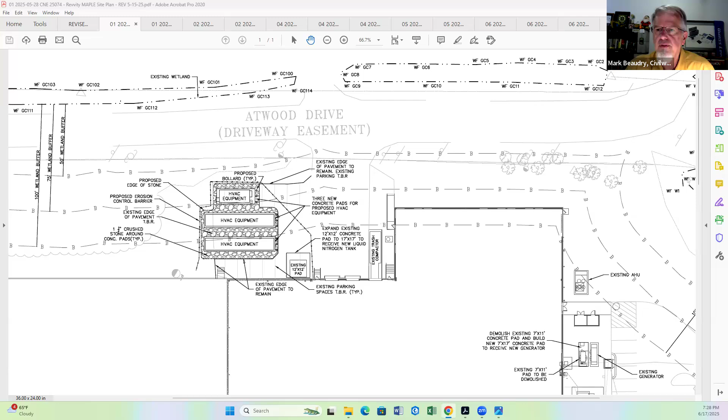But now that's a standing, valid wetland delineation. And if you pan a little to the north, you can see there was another wetland with the series W1 through W9 at the end of Atwood Drive. That's also part of the 68 Elm Street project.

Now the other line, which is hard to see, I think it's flag number 128, angles down to the northeast. That's the wetland line delineated as part of the original Perkin-Elmer project for 5 Parkwood and 68 Elm, dated back to around 2012. I think the commission decided at the informational meeting that wetland is so well defined, though maybe not as much as the drainage channel, that it's pretty well defined because of the slope.

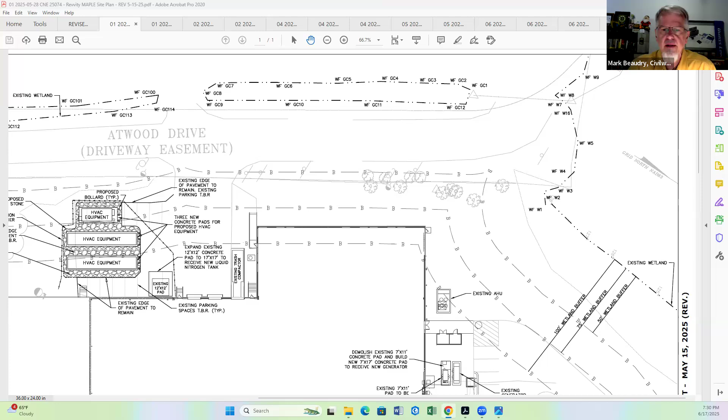So it was decided that line did not need to be redelineated. Importantly, there's another piece of work happening on the north or back side of the building, which is the proposed generator pad, well outside the buffer zone, as you can see. With that slope, there was no way the wetland line would change enough that the buffer zone would come into question. So the plan has been updated for that purpose, which is important. That's one of the things I mentioned.

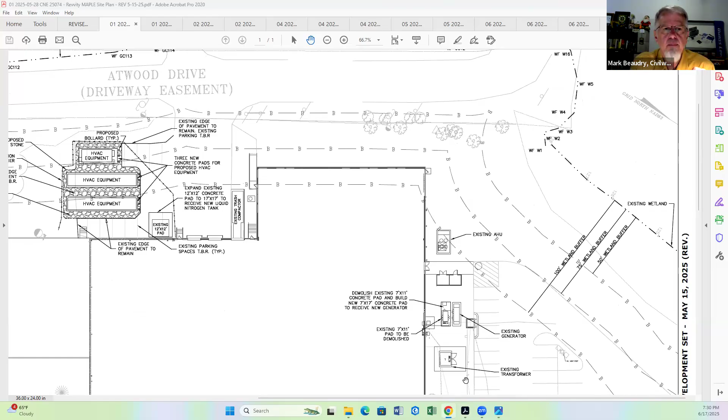And back to the HVAC equipment, maybe Judy or Anna, whoever's controlling here, could zoom in a little. What we did at the commission's request was move that outer HVAC equipment pad, which is closest to Atwood, to the north, so the entire pad and stone surround is within the area of existing pavement.

So now there is no new pavement, no new disturbance between the 50-foot and 75-foot lines. That's all previously disturbed land, and in fact it's going to be improved by switching the pavement to stone around the pads. Then in the 75-foot to 100-foot range, those pads still stick a little into the grass area.

That again is previously altered grass, and we left that as is because we couldn't change those pads without really affecting all the rooftop equipment and everything. So that outer pad was able to be changed.

And importantly also, with the addition of the stone around the pads, we're actually reducing the impervious cover on the property by 867 square feet. This area was used for parking of 11 cars, but with removing the parking spaces and replacing them with a component that is clean and has a lower impervious footprint, it's actually an environmental benefit to the area.

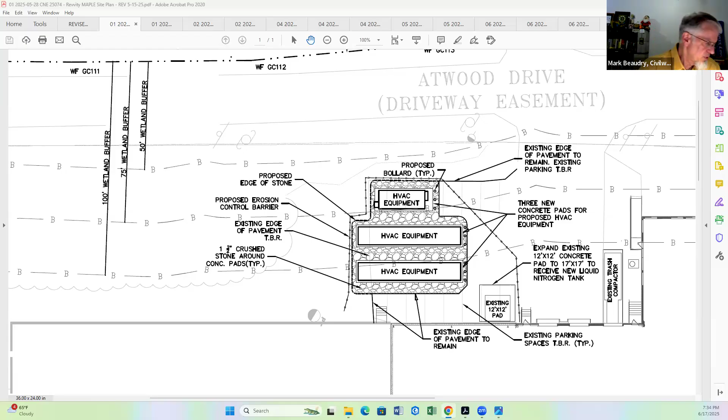So anyway, let's see, I'm sure there's something else. We did get some comments back, and oh, by the way, this is also not in any natural heritage priority habitat area or anything like that. Those Mass GIS information and whatnot was included with our application.

Oh, I know what I was going to mention. Under the local bylaw, one of the comments from Lucas Environmental was that we did not submit a formal wetland bylaw waiver request form. The way it was left by Lucas Environmental was that the commission should discuss whether they wanted that or not. At first, when I sent a letter back responding to comments, I deferred and said we're more than happy to discuss that. But during the day today, I looked at the form and realized it's quite straightforward.

So what I ended up doing was actually preparing that waiver form and included it by email with the plan revision and stuff. There you go, to Judy and Anna. So basically, I could read through it quickly.

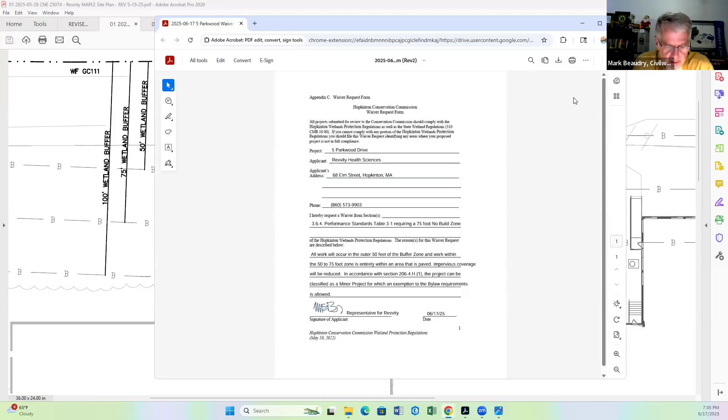I hereby request a waiver from section 3.6.4 performance standards, table 3-1, requiring a 75-foot no build zone. The reason for the waiver request is that all work will occur in the outer 50 feet of the buffer zone, and work within the 50 to 75-foot zone is entirely within an area that is paved. Impervious coverage will be reduced. In accordance with section 206-4H1, the project can be classified as a minor project for which an exemption to the bylaw requirements is allowed. Representative for Revvity, Mark Beaudry.

So obviously we respectfully request that waiver. The site is entirely paved now for the most part, and it's certainly within the 50 to 75-foot area, and then there's only a minor amount of disturbance of a previously disturbed area in the 75 to 100-foot zone.

Great, thank you. Is that it?

A couple others, I'm not sure if Lucas Environmental had a chance to review our response to the comments that they had, but I could go through them really quickly if you'd like. I don't know if the commission has seen them. I did see them, they came in yesterday, but I think we got them today. I was able to catch them and take a look.

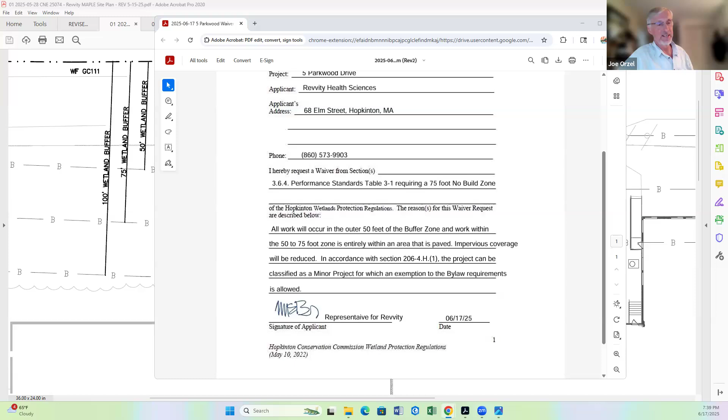Great, excellent. So the only other one I saw, Mark and Joe, was comment 2G, which is simply about PIBs and whether they're needed or not. Otherwise it seemed, Mark, that for every one of Lucas's comments, you made the adjustment or agreed and made the fix.

Yeah, and what Joe had suggested was a note on concrete wash, a note on what to do if there was stockpiling going on, and adding an erosion control barrier detail, and we did all that. So just really quick on the concrete wash, we basically followed the US EPA guidelines where we suggested a plastic lined hay bale pit where you put the concrete wash in, either pump out the water or let it evaporate, and then take the solids and dispose them off site. So that's what we called for on the plan.

Regarding what I'd expect to happen as far as excavation, it's realistically probably going to be loaded into trucks directly and hauled away. But if there was a small chance of a small stockpile, we would absolutely surround that by hay bales, by an erosion control barrier, and we included a note on that on the plan. The detail was basically for a silt sock type detail that we often use these days, so that detail was added to the plan as well.

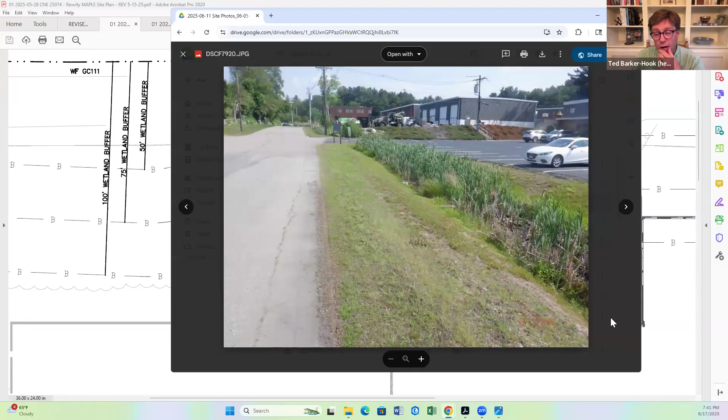Great, so I think what I'd love to do is ask the commission your thoughts on PIBs on this property. I'll offer that in this case, I don't know that I see a need for PIBs. The edge of the water is pretty obvious, and there are streets involved. It's not like a homeowner with woods in the back where trees may get cut down or anything like that. But I don't get to make the decision. In my mind, there's no need for PIBs, but I'm wondering what the commission thinks.

I would be in agreement, Ted. I agree as well. Yep, I agree. Is there anyone who doesn't agree? Please speak up.

By the way, an update: Ed is having trouble getting on. He's in town hall but can't seem to get Wi-Fi, so hopefully we'll see him soon, but he's struggling to get in. Maybe we'll see Ed in a bit.

Commission, was there anything else in Lucas's notes, or if you got to look at Civil Works' responses that you think we need to address? Not for me.

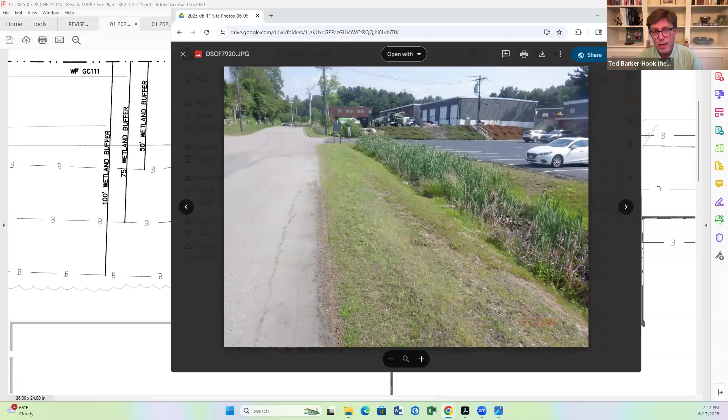Hearing none, is there anybody from the public who has questions or concerns about this project?

Speaking of the public, Mr. Vice Chairman, it turned out, like Joe was saying, something was happening with our PDF creator that day, and the map of the 300-foot abutters was total gibberish on the PDF. So I provided a new, clean PDF of that today for the record. Great, thank you. You're welcome.

It feels to me like we're ready for a vote, but I'm going to get the wording wrong. So I'm wondering if Anna or Judy can tell me exactly what the motion is we're looking for. Yeah, let me pull up an example for you so that I don't mess it up.

So this was one of the last RDAs that you all had voted on. If you're voting for a negative determination, meaning they don't need to file for an NOI, the language is: area is not subject to jurisdiction, work is in jurisdiction but will not remove, fill, dredge, or alter. Work described in the request is within buffer zone but will not alter, therefore does not require filing of a notice of intent. And I can double check what the request was from the applicant for what it should say.

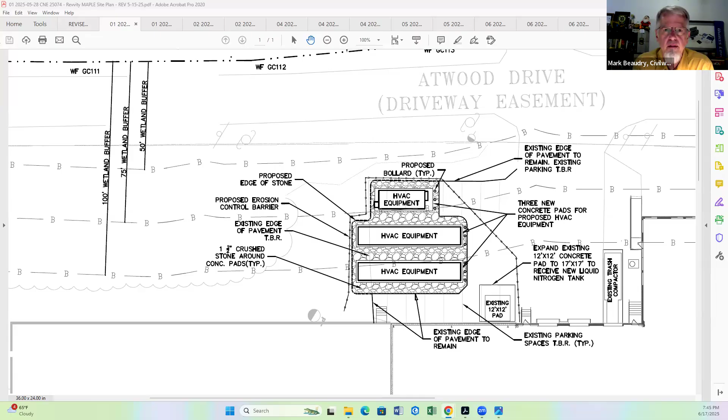I'm probably going out a bit on a limb, but is it possible to discuss the certificate of compliance request? Because we did get comments back on that today from Lucas Environmental. I'm thinking that might go quickly.

Anybody? Yeah, go ahead. We just got comments back from Lucas this morning, and I have not looked at them. So I have no recommendations, unfortunately, yet. None of us have seen any of that work, Mark. So we're going to need you to come back to deal with that as a separate issue.

All right, if we could do it soon, because from my understanding there's some kind of real estate transaction in the works with the owner, and this being kind of hanging out there is kind of holding that up. So the sooner we can get that done, the better. But I do absolutely understand where everyone's coming from.

Judy, do we have space on July 1st, or is that a packed meeting? Usually we don't schedule COC discussions until staff are fairly confident the board will approve, and like I said, I haven't looked at what Joe's comments were yet.

Mark, we'll do the best we can for you. That's all we can promise. Excellent, that's all I can ask. Okay, thank you very much. Have a great night, Mark. Appreciate it. Bye-bye.

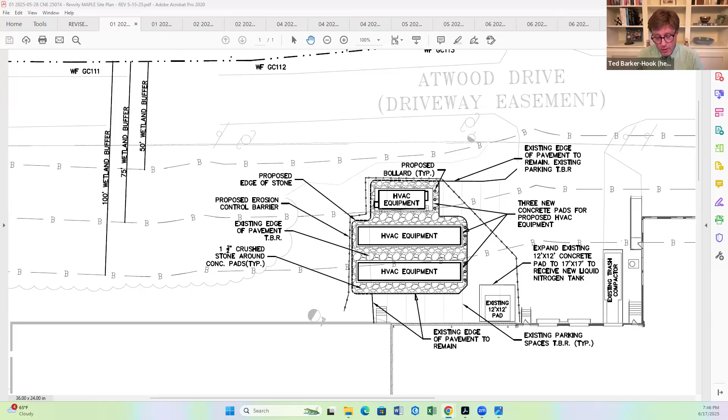Okay, moving right along, we have to open another new hearing, which means I get to read another piece of paper. The Hopkinton Conservation Commission will hold a public hearing on Tuesday, June 17th, 2025 at 7 p.m. virtually online to hear all persons interested in a request for a determination of applicability filed by Donald and Karen Wolf to replace a septic system with appropriate associated site work. The location is 11 Edge Hill Road, Assessor's Map R7, Block 19, Lot 0.

I have one small question before I even open the door to you.

Wolf's. Is Edge Hill Road one word or two, and does it matter for her paperwork?

Hi, this is Karen Wolf. Typically two, but I don't think it matters. When I was on Google Maps, it seemed to be one word, so I got confused. But thank you. Would you like to tell us about what you're hoping to do?

Sure, my husband is representing. Karen Skinner is our representative. Welcome, Karen. Would you like to fill us in on what's going on?

Certainly. For the record, my name is Karen Skinner Catroni. I'm a wetland consultant representing the owners of 11 Edge Hill Road.

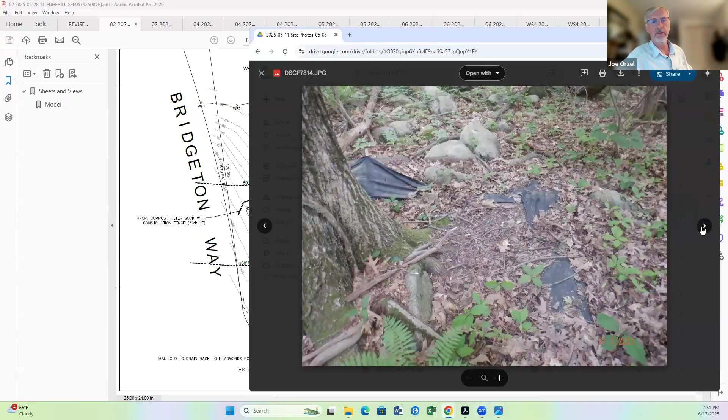there was some leaf dumping in the area of wetland flags 2 through 5, probably not associated with any work that happened on this lot. I spoke with the property owner when I was out there. There's old silt fence remaining in the area of wetland flags 1 through 3, along the wetland edge into the wetland and actually in the stream located in that area. Based on my discussion with the property owner, I think that was associated with work that happened for the crossing for Bridgeton Way a number of years ago, but it's still in the field, and probably someone should get that out of there.

Joe, before you go on—just on that point, is that the kind of work that a homeowner could just pull out, or is that going to do damage to what's going on there? Does it need a more careful hand than just removal?

I think parts of it can be removed fairly easily, but parts of it are kind of buried, and it's gonna take a little work. I didn't follow the length of the whole thing, so I wouldn't be surprised if parts are well buried. I just kind of saw the parts that were exposed and the part that crossed the stream.

Commission members, that'll be something to keep in mind, I think. Thanks, Joe, keep going.

Just regarding the certified vernal pool that's mapped, as Karen had mentioned, it's about 250 to 275 feet off-site to the southeast. That's where the Mass GIS pin marker is for the vernal pool. Looking at aerial photos, it looks like the actual edge of the vernal pool, when you can see ponding, is larger than that, and potentially with the additional buffer zone under the bylaw, the edge of work could be getting close to that additional buffer zone.

However, I think really where they're locating the system is as far away from that vernal pool as it can possibly get, so I don't know that there's any other option if it were within the extra 125 foot setback. And it's a replacement system, not a new system, so I think that may remove it from consideration for that extra buffer.

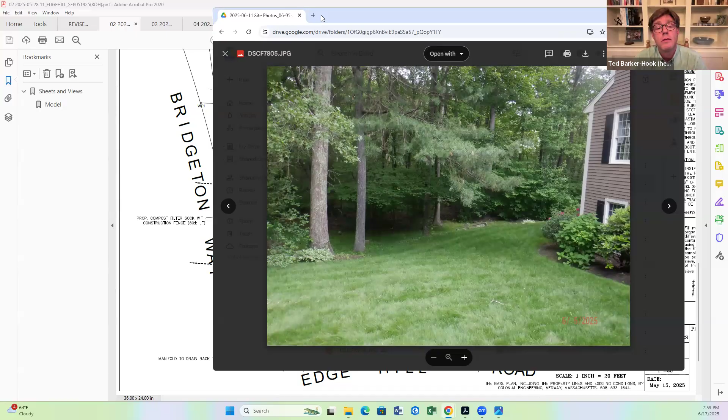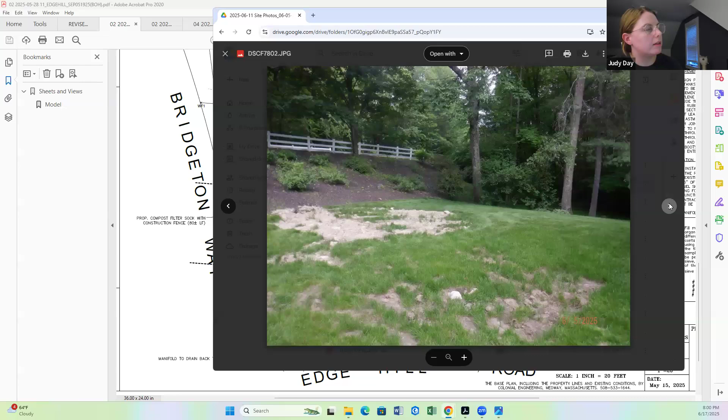So yeah, what I'd like to see, and what I hear, let's look at some photos really quickly at the backyard. Do we have several, Judy, or just one or two? So this is the side, and then these are all Joe's pictures. And then you come around the back. This is where the leaves were.

And I think this is the best shot we have of the limit of lawn in the back. Does the lawn, Don, kind of stop where those stones are, or do you mow on the other side of those stones? I actually mow the stones, but it's not grass, it's mostly weeds. So I just try to keep the weeds under control by mowing them. But the grass is just really where you see those rocks, it doesn't go into that area.

So it would be helpful to me, and I'm going to open up to the commission in a moment, because actually we haven't talked about your septic at all. I jumped right to these other issues. It would be helpful to me if I had a plan that better showed me the edge of the grass and where the PIB markers would live, because those rocks throw me for a loop a little bit, and I can't quite, from that photo, understand exactly where lawn would be, where a marker would be. So, yeah, I feel like I've gotten things out of order because we haven't talked about your septic at all.

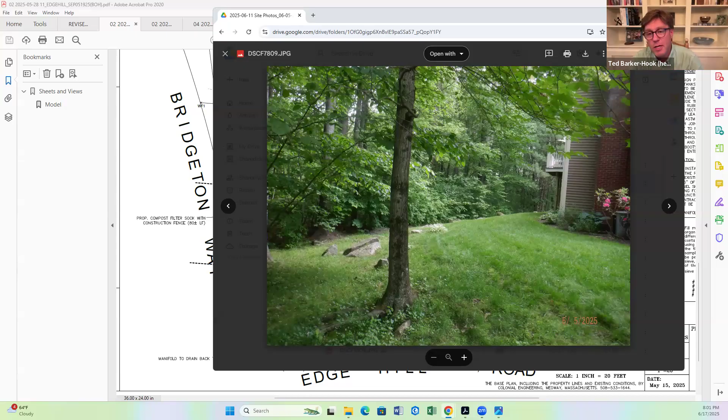So let me do this. Commission, I'm going to shut up for a moment. Can we look at the plan with the septic, and let's focus on that for a moment. Do commission members have questions or concerns with the main focus of the ask here, and doing it under an RDA?

Ted, from my perspective, I think an RDA makes a lot of sense in this situation. Getting a failing septic system repaired is certainly something we want to get done sooner than later. That's a more likely issue to cause a problem if we don't. And then on the PIB subject, from my perspective, I think if we have PIBs along the tree line at 50-foot intervals, kind of beyond the weeds, where the tree line truly starts, I think that's an appropriate location, given we don't know necessarily the limits of lawn that were originally approved as part of this development. So to pull it back feels a little unjustified unless we have some basis for it.

Thank you, Matt. Other commission members? I agree on the RDA with the septic. It's going right where the old one was. I think it's all previously disturbed. The reason I skipped over it is that part seemed obvious to me, but I don't want to think for everyone else. Other commission members on the septic and the PIB seem to be our two discussion points right now.

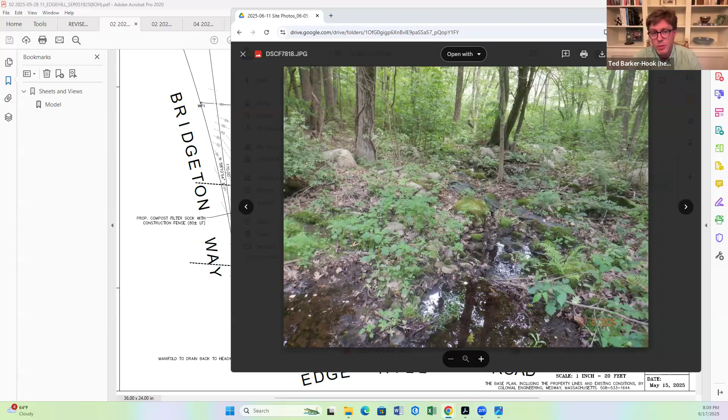Okay. Commission members, is there anything else that comes up, or did I rush through this too quickly and not give you a chance to bring up an item or two?

Through the chair, it's sort of unrelated, but if the silt fence is still there from a prior project, when they built Bridgeton Way, does that mean they never got a certificate of compliance, and should we potentially look into having them wrap that up? For the Bridgeton Way builders? Yeah, if the silt fence is still there, does that mean there was no certificate of compliance, because we would have had it removed then?

That's a good question. Through the chair, we can look into that. I don't know off the top of my head, but that's a good question. It is a good question. All right, thank you, Judy.

Sure, and thank you, Janine. Oh sorry, I heard the J and thought you were thanking me. No, sorry, I did. Well, I thank you both. I thank Jim as well.

Commissioner, all right, good to be. Anybody else have a thought or something they want to throw in? Is there anybody in the public who has a comment or question?

So I think what we're looking for is a motion for a negative determination and permission for signatures. Through the chair, yes, sorry, I would maybe recommend if there's things you're still looking for on a site plan to hold off on issuing a DOA so that the timeline doesn't start and we know we can get those materials.

I think you're right, because I would like to see the erosion control around the pile, and maybe we could put on there where the PIBs are going to live. I think you're right, we ought to hold off a vote for one more meeting. Are you okay with that, Don and Karen?

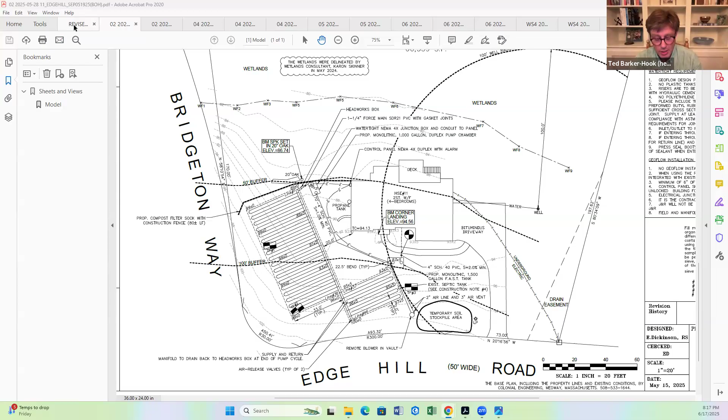Through the chair, can we just open and vote to continue the other one, please? You know, I had a mental note for that before and then I forgot. So yeah, we're going to open the hearing and then we're going to continue it immediately.

The Hopkinton Conservation Commission will hold a public hearing on Tuesday, June 17th, 2025 at 7 p.m. virtually online to hear all persons interested in a notice of intent filed by Alicia Ila Solon and Samara Vern Solon, 1993 trust, for parking lot alterations with associated site work. Location 85 to 89 West Main Street, Assessor's Map R23, Block 75, Lot 0.

Do we need to vote on continuing it? Yes, I would love a motion to continue that hearing to July 1st, 2025. I'll make that motion. Second. Roll call vote: Jim, aye. Melissa, aye. Janine, aye. Heather, aye. Matt, aye. And Ted Barker Hook is an aye.

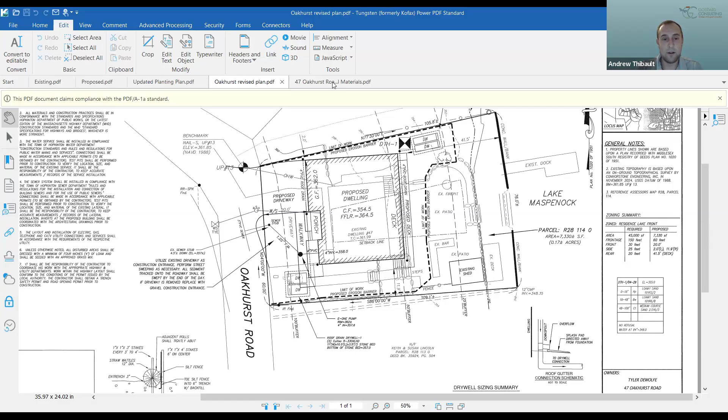We also added the FEMA flood zone line to the plans. Another important submittal was discussed at the last meeting. As of now, we're currently showing a 25-foot no-disturb and a 50-foot no-build.

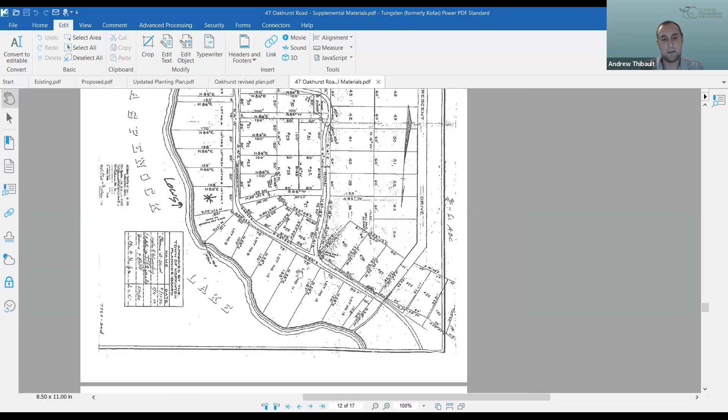We had some conversation on the waiver request we'd submitted and whether this property would be subject to a 50-foot no-disturb or a 25-foot no-disturb. In the revised materials, the commission received the subdivision plan of land last revised in 1950. We clarified in our comment response letter on May 20th that we feel the 25-foot no-disturb and 50-foot no-build zones are applicable to the project here.

Another request from that conversation at the last meeting, in the Lucas letter, was about the fact that at the time we were showing much of this work as existing.

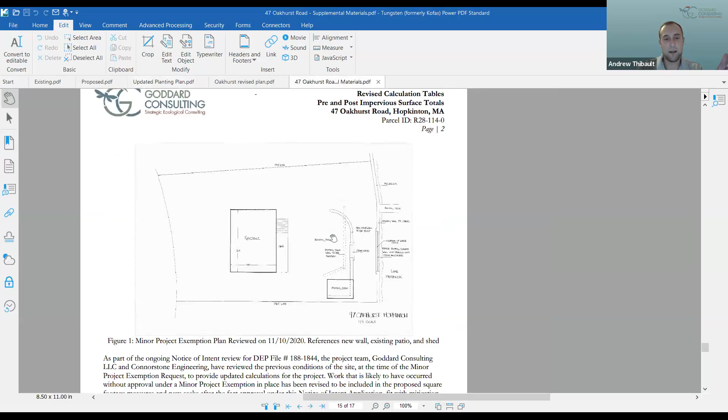We had that conversation about what portions of this were done under the expectation of that minor project exemption that appeared not to have been granted. It seems like some of the work being called existing really needs to be captured under this notice of intent. So we worked with the engineers to go back and look at the property at the time of that minor project exemption request, to see what was there then versus what's there now.

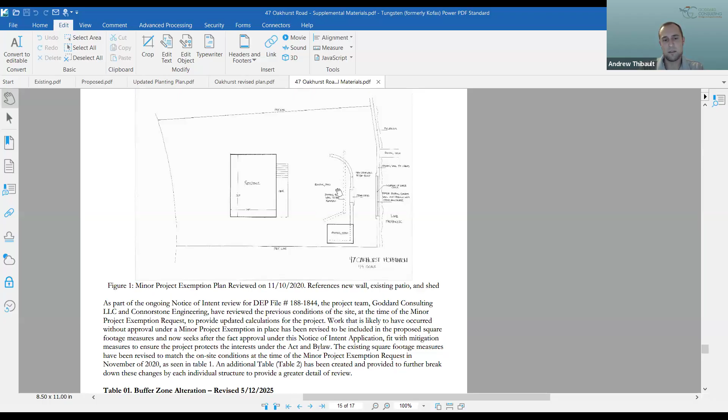We submitted a letter touching on this. What we found is that some of this work was discussed - there's the wall shown here with intent to be built. They discussed the existing shed, and made reference to an existing patio, but the work to be done up gradient wasn't quantified, exactly where it'd be located. In reviewing the meeting minutes, it seems a minor project exemption was never actually granted - it was just discussed at the meeting. There were more materials to be submitted, and things fizzled out.

So the engineers gave us calculations based on that old work of what actually was sitting on the property in November of 2020. We revised all of our buffer zone calculations on this project so the existing now means before this minor project exemption was submitted to the commission, before any work had occurred, before this notice of intent filing - that's now our existing numbers. The proposed impervious surface cover numbers are now any work done outside of that, anything proposed under this project. It's now all to be brought and quantified under this notice of intent.

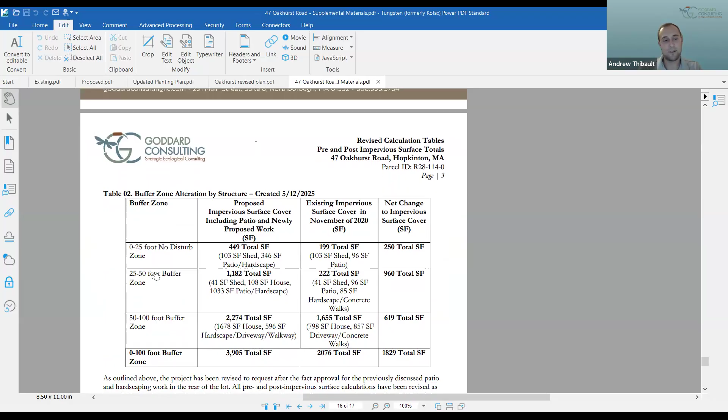We want to make sure we have approval for everything, and also that our stormwater management system is sized appropriately. We also broke that out by square footage of each structure specifically within the 0 to 25, 25 to 50, and 50 to 100 ranges. It's important to note that we found there is a complete net change to impervious surface cover.

The net change is 1,829 square feet, because the existing back in 2020 was 2,076, and we're increasing it up to 3,905. The Cultecs have been sized for 4,080 square feet, so in quantifying this we made sure they were sized correctly. With the test pit, we confirmed the separation from seasonal high groundwater.

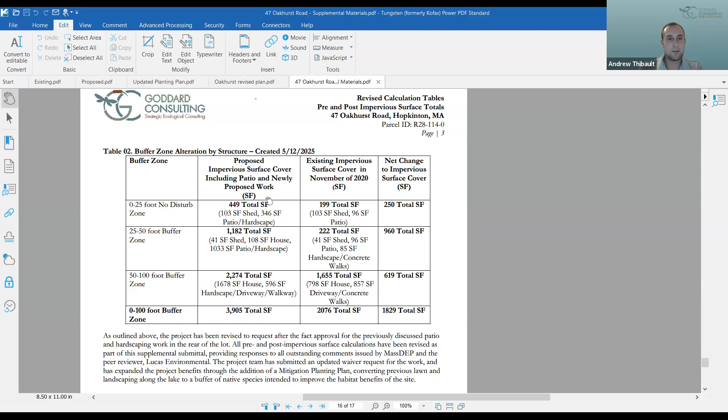This was all submitted to the commission on May 20th, and as I mentioned, we got a peer review letter from Lucas on June 4th. There were a few comments left in that, as far as minor plan revisions, a planting substitution, and also a request to include a straw bale along the plantings we see here, to make sure there's no erosion going into the lake during planting, plus a bit more discussion on the waiver request we have going on.

So the commission will be receiving an updated submittal that clarifies the remainder of the Lucas comments, but because the last meeting was canceled after we submitted this on May 20th, we wanted time to discuss all our changes here with the board, see if there are any other questions or comments, or if there's anything Joe Orzel from Lucas wants to add to my summary, and make sure the next submittal incorporates all open remaining comments.

So with that, I'll turn it over to questions.

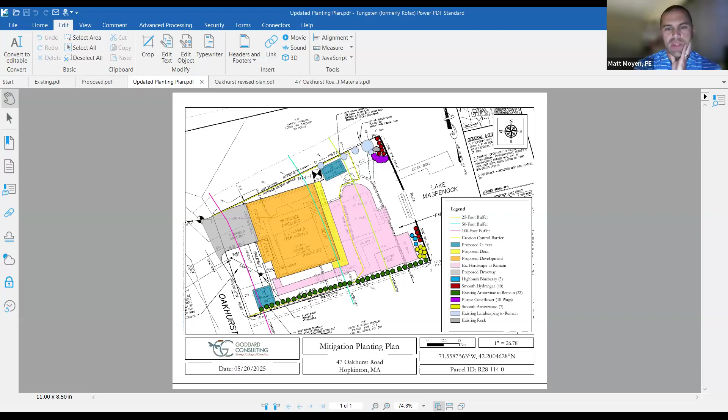Appreciate it, Andrew. Before we get to questions, Joe, do you have anything you'd like to add? I can touch on a few.

I think a lot of the original comments we had were addressed. Just a couple of outstanding items I'll touch on briefly. The applicant submitted subsequent information on a DEP superseding order of resource area delineation regarding existing lawn prior to 1983, before implementation of the Wetlands Protection Act, and how it might apply to this location.

We had pointed out there was some observed hydric soil above the retaining wall. At the time I looked at it, it was still pretty solidly frozen. I got one or two augers in, but didn't spend much time looking at the extent of that. But it looks like the hydric soil doesn't extend far above the wall - that's number one. Number two, the vegetation at that time was very low and primarily just a grass, and could not be identified at that time.

The information submitted by Goddard is that as we've gotten into the growing season, most of the vegetation coming up in that area is indicative of upland vegetation conditions. So it apparently wouldn't meet the vegetation requirements, but I have not looked at that in the growing season personally.

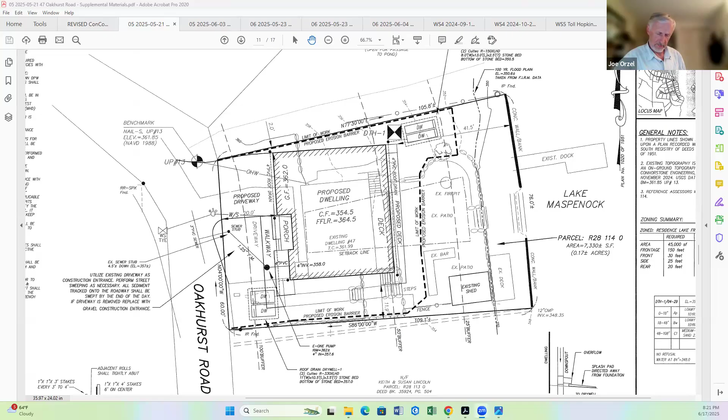Remaining question on the previous patio area. It's being considered, I think, as impervious. I was just wondering if the applicant had additional information on what that patio consisted of. Based on the aerial photographs, it wasn't apparent what the surface of the previously existing patio was, and just wondering if the applicant has knowledge of what that consisted of, as it may create a change in the pervious and impervious calculations.

Also, the Hopkinton Conservation Commission had stated in their approval for the exempted work that was approved - and I'll read the quote - further detailed information should be provided for the stairway to the lake, and it would appear to be amenable as a minor project if the steps of the stairway did not extend beyond the existing wall and did not extend into the lake. So I have some photographs that I submitted, which show that the steps are new and the steps do extend beyond the edge of the wall. Therefore, that may be something that needs to be included in the current notice of intent, because it looks like that was not included in the minor project exemption issued by the Conservation Commission.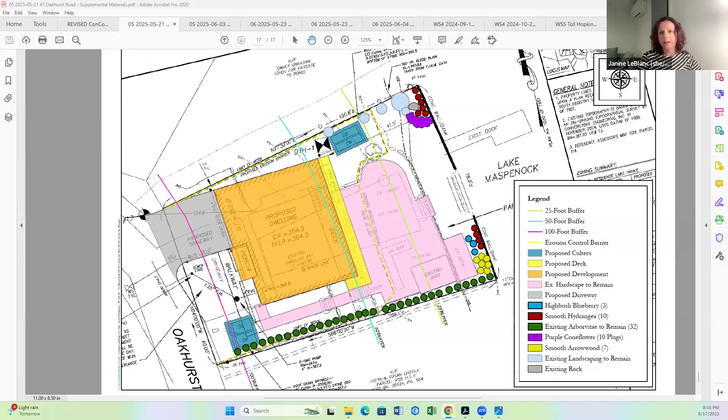Melissa, aye. Ted, aye. Janine. Abstain. Yes, thank you for reminding me. Heather, aye. Jim, aye. And I am an aye.

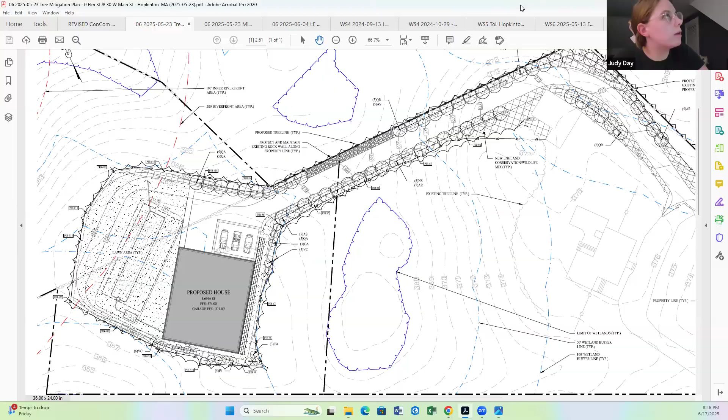Judy, if you could allow me to share my screen, that'd be appreciated. Don't worry. It should be able to. Okay.

Judy, while Sam's getting his screen set up to share, can you just update the commission on what's occurred since we last met? I think we've got some new documentation in the file. Sure, so we have updated plans showing a tree mitigation plan as requested by the commission the last time this project was discussed. A significant amount of trees are being proposed now along the length of the driveway, and the applicant has provided information on the mitigation ratio. There have been PIBs added around the house as well as along parts of the driveway. We have had a second review from Joe and have not received responses to that yet. That should be it. Okay, thank you, Judy.

Sam, if you want to run us through your presentation, that would be great. Yeah, I just want to say it's been quite some time since we've been before you, I think it's over a month now. So just to catch everyone up, we have been issued a DEP file number. And the project subject site, I'm sure you're somewhat familiar with. Just to bring you back up to speed, it's between Elm Street and West Main Street.

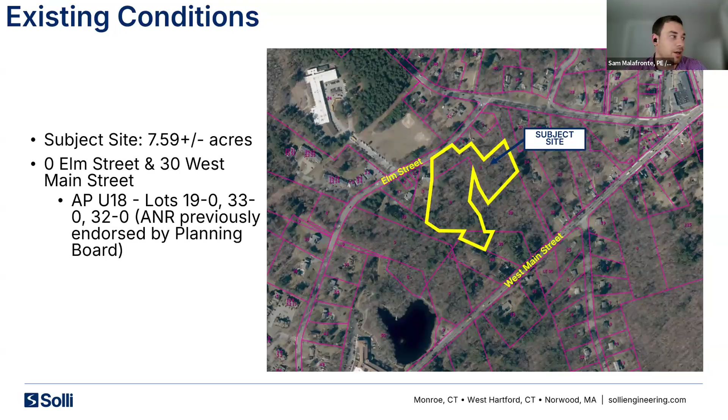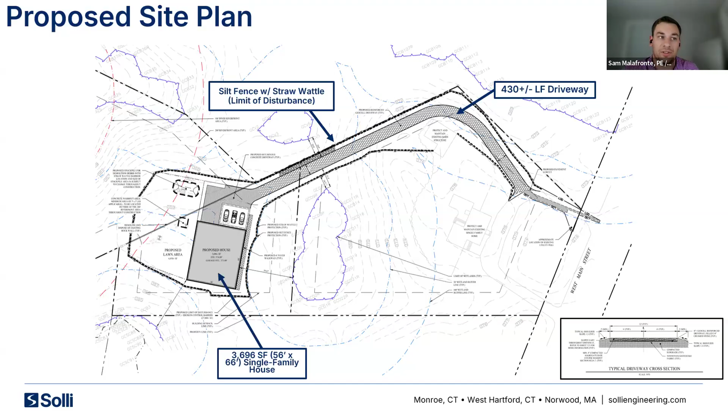The single family residence is proposed access through 30 West Main Street. And there's a significant riverfront area as well as some isolated wetlands with associated buffers throughout the property. In the revised site plan, which we briefly discussed about a month ago, we were able to reduce the impact to the riverfront area quite significantly. I think it was down to about 1.7% of the entire riverfront area of the property. It's just under 3,000 square feet of disturbance.

As we discussed previously, the disturbance is kind of in direct relation to the leaching field, and the leaching field's location is directly dependent on the soil conditions that were observed on site and performed during the perc testing. So as Judy mentioned, we have submitted a tree mitigation plan as well as a PIB plan.

So I've colorized it a little bit here just so it's easier to talk through. We are proposing 61 native trees, and I've outlined the mitigation rates that we're proposing, as well as 20 shrubs, which vary in species between summer sweet, holly, and high bush blueberry.

Judy did have an email correspondence back to me after submission regarding a PIB installation along the northern and easterly property lines, and I've outlined those with these red arrows. There are existing stone walls that run the property line, and based on the definition of PIBs in the regulations, I didn't think it was applicable to add placards as well. We certainly would be amenable to that if the commission thought it was necessary. But those do run the property line.

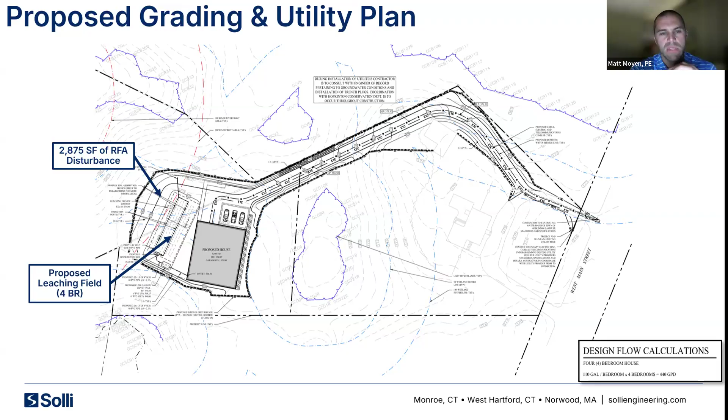Okay, that's helpful too. From a siting location - and Sam, correct me if I'm wrong - it appears the only area on site outside the buffer zone is shown on this plan, and it's sort of a somewhat rectangular shape, I guess is the closest thing I could describe it as. Yeah, right where your cursor is right now. Is that it? Can you help us understand where there is area on site outside the 100-foot buffer?

Correct, yeah. So yes, that's 100%. I was just making sure the top right corner didn't have any areas, but the only areas outside of the 100-foot buffer, also outside of the 200-foot riverfront area, are kind of this rectangular area here.

I actually sit on a conservation commission as well, and with the commission's bylaws and regulations, where you have a set no-build, I would disagree. I understand it's jurisdictional and the review areas are between the 50 and 100, but you have a set no-build that we are complying with currently. Besides that, the issue of the single-family driveway or the shared driveway, there's no waivers needed or requested. I just want to make that clear.

Obviously I don't sit on the commission and I don't have an opinion on this, but that's my opinion on how I read the regulations. So yeah, thank you. But yes, the only non-jurisdictional area is this rectangular piece.

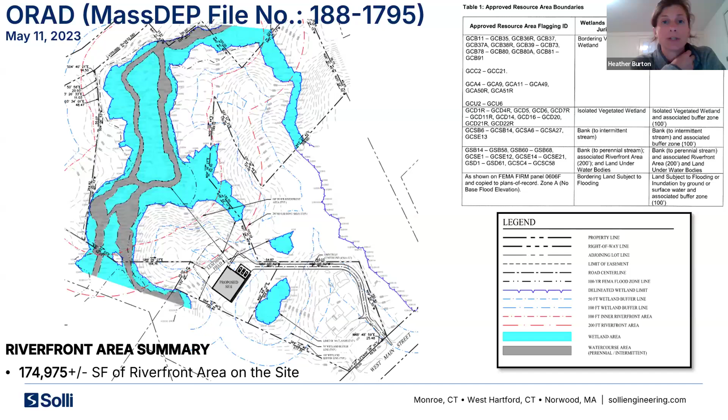So the proposal to plant 61 trees, what is the plan for maintaining those trees so that you can kind of ensure that they're going to survive? It's a lot of trees to maintain. Just curious.

It is. Truthfully, I would have to speak to our landscape architect, and I could certainly provide a maintenance plan for those. I would assume you guys would be looking for some sort of survival rate, 2 or 3 years after, as a condition of approval, similar to a replication area or such. I'm not sure how that's been regulated previously, but we'd certainly be open to that if the commission preferred it.

Through the chair, thought it might be worth mentioning, Anna and I go on exemption requests for tree removals along driveways, this close to driveways, probably on a weekly basis. So I would just have questions about the long-term viability of tree plantings that close to something that access needs to be maintained to. Just something I would add there.

Yeah, I share that same concern about proximity to the driveway and the spacing of the proposed plantings, the likelihood of survival. So I think, Sam, it would be helpful if the landscape architect could provide a narrative on those topics, so we can be a bit more informed as to what the long-term outlook would be.

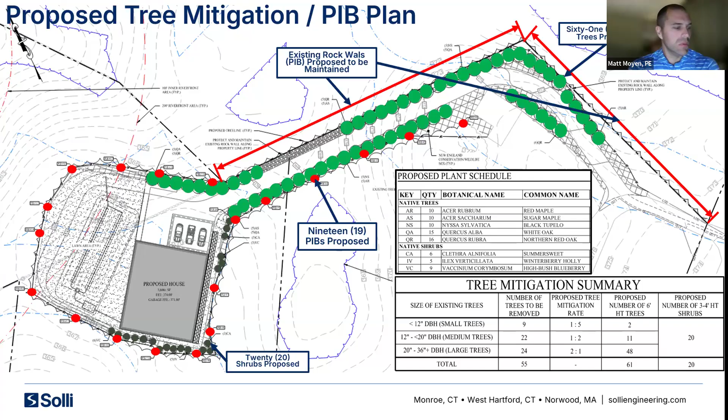And then commissioners, I think between now and the next time we connect on this particular application, just put some thought into whether or not we think there's any significant adverse impact to the riverfront area for this proposal, and whether or not we're willing to approve those impacts. And then just take a look at our bylaw and regulations and evaluate the project through that lens. Regardless of whether we move to issue an order or deny the project, we're going to want to have some clear justification for why we're doing either or.

All right, let me ask you first, Sam, are you comfortable that a week's time is enough to get updates and documentation pulled together and submitted so we have an opportunity to review it ahead of July 1st? Yeah, certainly. I can get that likely pulled together and submitted by end of the week.

Okay, so I'll entertain a motion to continue to July 1 then. I'll make that motion. Thank you, Ted. Thank you, Heather. Quick roll call.

Heather? Aye. Melissa? Aye. Janine? Aye. Jim? Abstain, please. Okay. Ted? Ted is an aye. And I am an aye. Thank you all.

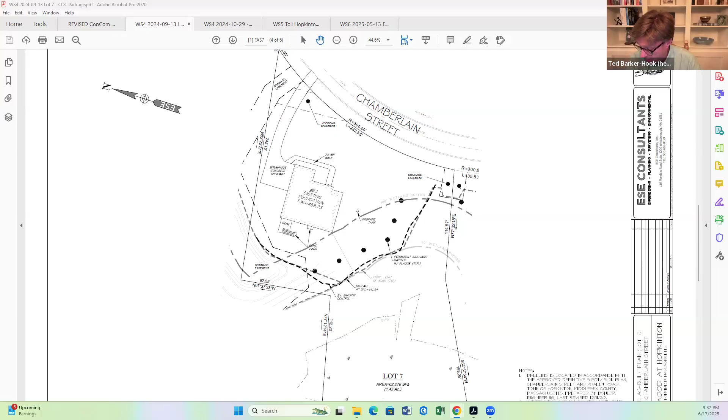Through the chair, can I just ask a brief question before we move on? You made a comment about homeowners, other homeowners possibly mowing into the buffer area. Yes, indeed. And my thought, other than telling them to not do that, which we've done a number of times...

would be to bring the COC applications before you and you potentially deny them for those reasons, so that we can then present a formal reason for them not to have a COC. Does that sound like a reasonable path to you, or do you not want your time? If that will get the homeowner's attention, that sounds like a great way to do it. I certainly would not be ready to approve any of the COCs for the houses I have in mind based on the mowing. I wouldn't expect you to, and I want to make sure we're aligned.

Let me just ask Judy, do you see a problem with that strategy, or have you spoken to them? No, I was just gonna say, I think that makes sense, but I was also planning on sending letters, doing a quick drive down both roads, seeing which ones are maintaining past the PIBs, and sending an identical letter. If we're still seeing it after that, it might take some time to notice if they're actually doing it. So if we want to get it resolved sooner, and if Ted, you're looking to really push the COCs, then that might be a good strategy as well. But I'll probably send the letters anyway.

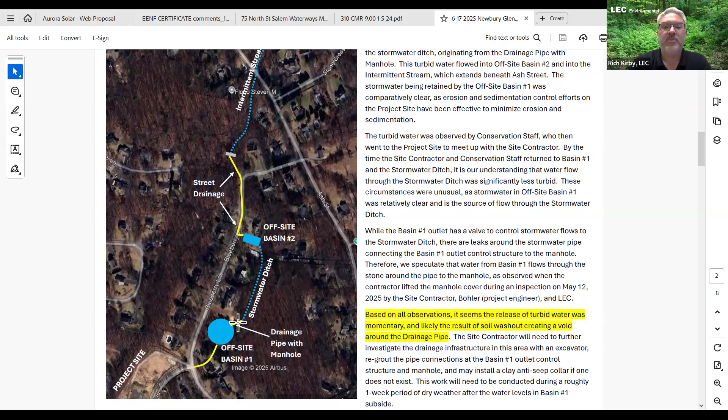And so, based on all of our observations, it appears as though it was a failure in this pipe, which had been replaced by the prior contractor, that caused the momentary release of sediment, relatively momentarily speaking. So water going into the basin was relatively clear. So it was a failure at this point that we concluded.

So at that meeting, we talked about a number of things that we were going to implement. Specifically, we were going to repair this drain pipe, which has been done. I'll get to that in a minute.

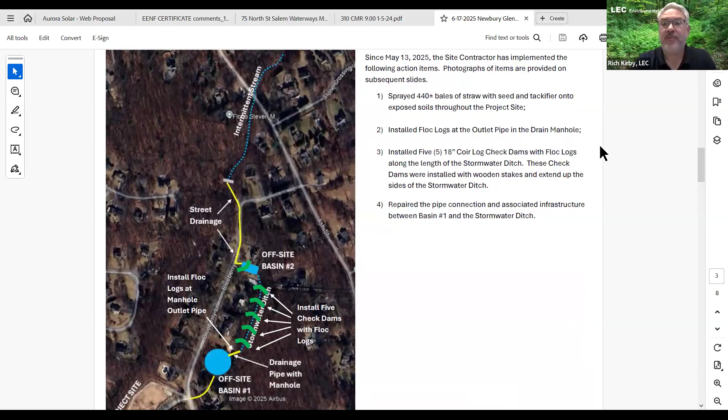We also installed 5 18-inch coir log check dams with floc logs along this section of the stormwater ditch, so if we had another release, we'd have protection to the offsite basin number 2 here. We also sprayed 440 bales of straw with seed and tackifier onto the exposed soil throughout the site. And here's some representative photographs of these.

This was submitted to the commission shortly after it was done. These photographs were taken while the work was in progress. Here's a representative photograph of the 18-inch coir log secured with oak stakes with the floc logs on the down gradient side of the stormwater ditch.

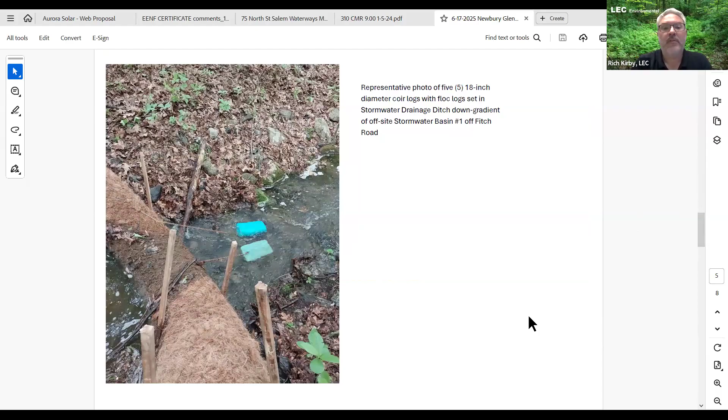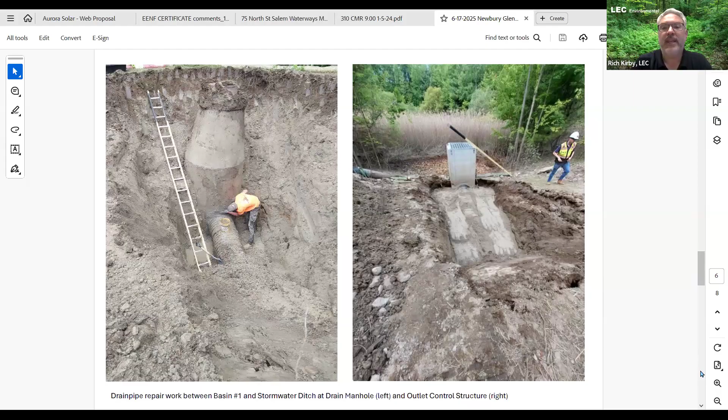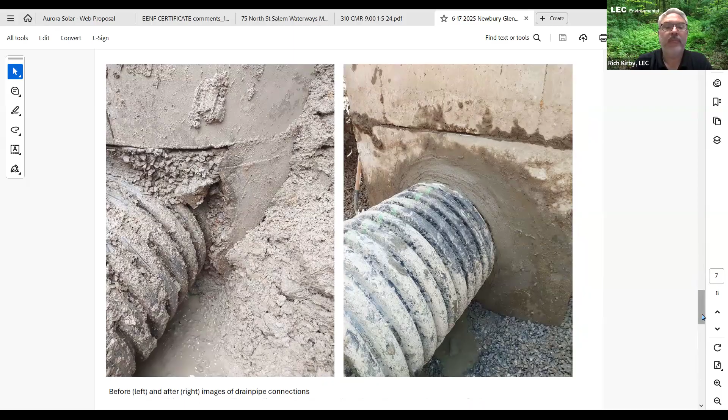And here you can see just a representative example. This is what the grout work looked like when they excavated the hole, and this is what the grout work looks like before they backfilled it in. So things were done properly out there, and we don't expect to have any more momentary releases of sediment based on the infrastructure failure at this pipe connection.

And finally, Rich, if I can interrupt you for just a second on that. Sure. Critical to note that anti-seep collars were also installed in that section that were not part of the plan, but were certainly lacking before. We thought, and found upon excavation, that water was following the pipe along that run, and installing those anti-seep collars prevents that from happening. We've seen a drastic reduction in the amount of water coming through the outlet since that was done.

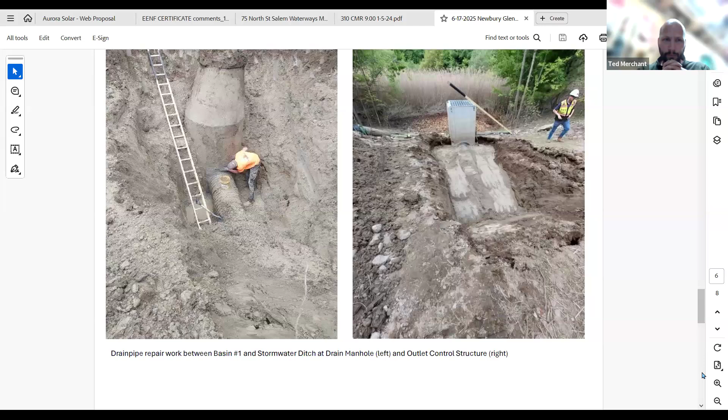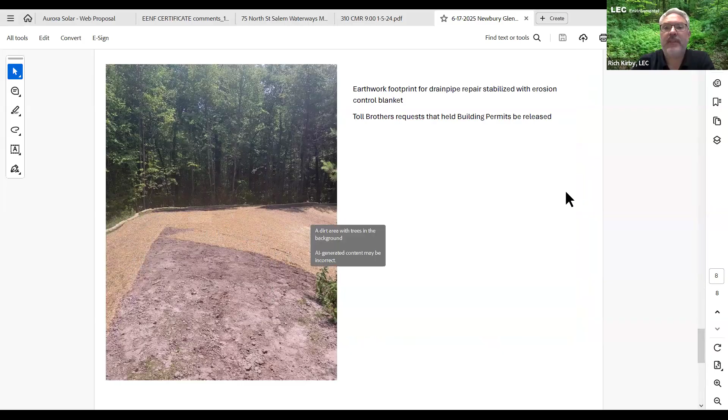All right, thanks, Ted. And lastly, all that work's been done. The footprint of excavation has been stabilized with erosion control blanket. And at this point, Toll Brothers is requesting that the building permits that had been held be released. And with that, I turn it back over to the chairman. Thank you very much.

I am wondering if we've had any commission members, or Judy or Anna, go out and see what things look like recently, or Joe. Through the chair, yep.

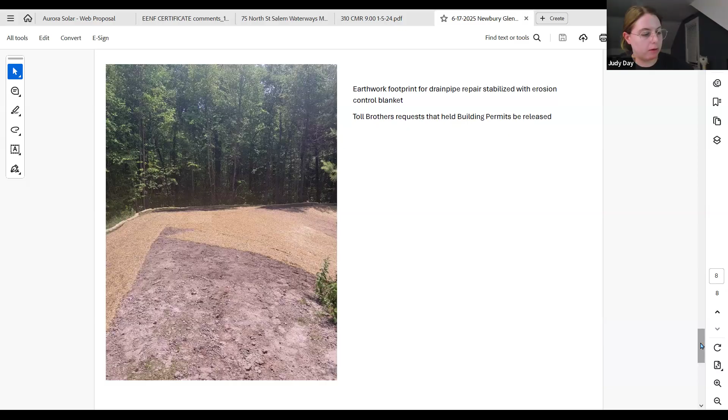So Anna and I have been going out pretty regularly. We were out when they were doing the improvements at the catch basin and the channel. We've seen the coir logs go in, and saw ourselves that after they repaired the leak in that pipe, flow downstream substantially went down.

So that seems to be working. Have observed that they've stabilized the site. Haven't seen any turbid runoff since our last discussion. So from my perspective, everything presented at the last violation discussion has been implemented as discussed, and I have not seen any additional issues.

Does that mean, Judy, that the work is complete? The work that they thought might take 6 weeks is done? Because I think it's not quite 6 weeks, and maybe they were ahead of schedule.

So everything that was presented to the commission to fix the issues with the berm, as well as any on-site issues, has been completed to my knowledge. And I have been out, we've been out there every day checking on things, making sure work is moving along. So to my knowledge, yes.

And they have stabilized where they were doing the digging with those straw mats, so even the more recent work is not currently exposed. Okay, thank you.

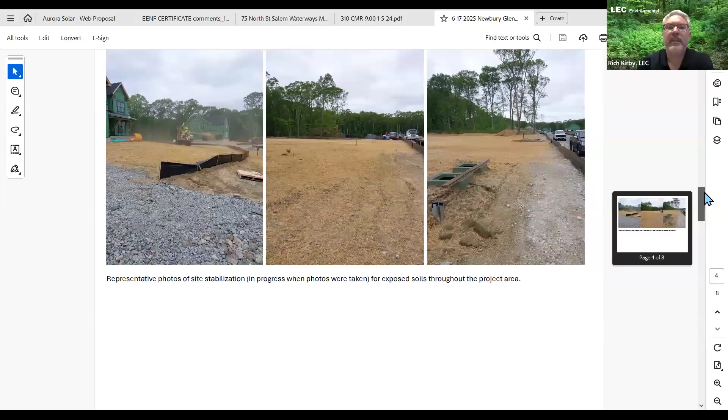Sure. So that was photographed in the beginning here. Since the last hearing, the commission really pushed us to have all areas of exposed soil stabilized. So this is where the 440 bales of straw were sprayed by Hydrograss Technologies. These are just some representative photographs of what that looks like, but it was sprayed all over. Sections have begun germinating, so we are in very good shape, in my opinion, with respect to exposed soils on the site.

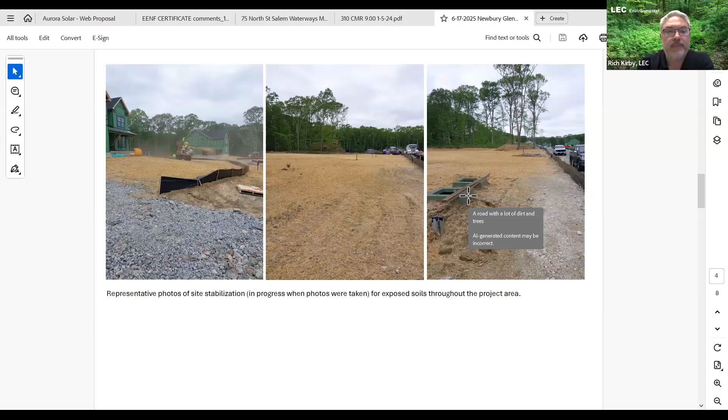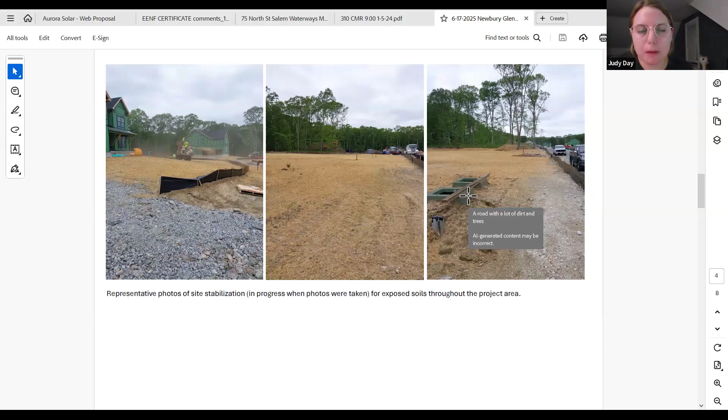Through the chair, yeah Judy. Sorry, I would also add, we did have Pare, who is the consultant responsible for SWPPP reports, observe the work done on the berm. So that was peer reviewed, and we have their memos in the SWPPP folder in the public drive folder. And did they seem satisfied?

Yes, so I can pull them up really quick. This is not me forgetting they existed, I promise. I never thought that for a moment. It might take a minute, so if you have something else you'd like to bring up, Rich.

Are you guys ahead of your 6-week guess? Did you actually complete that in less than the 6 weeks that you predicted? Yes, I think we lucked out with the weather, with the rain sort of holding off a little bit. The contractor was able to dewater that first basin using a dirt bag and changing it often, so they were able to lower the water levels to the point where they were able to do the work.

Great. I'm impressed and grateful for that.

While Judy's pulling it up, I don't want to put our commission members who are also stormwater engineers on the spot, but Matt or Melissa, I wonder if you have any questions. Oh wait, maybe we ought to pause for a second, Judy seems to have found what we're looking for.

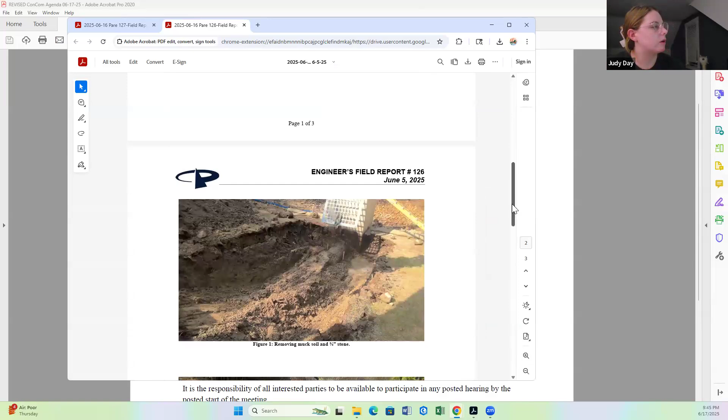Yep, so I'll clarify the materials we've gotten from Pare are more observational. So we have description of the work activities and pictures, not necessarily a narrative on whether the work was done correctly. But I think in general, when we get reports from Pare, the SWPPP reports, they identify maintenance needs or corrective actions, and we have not received any of those.

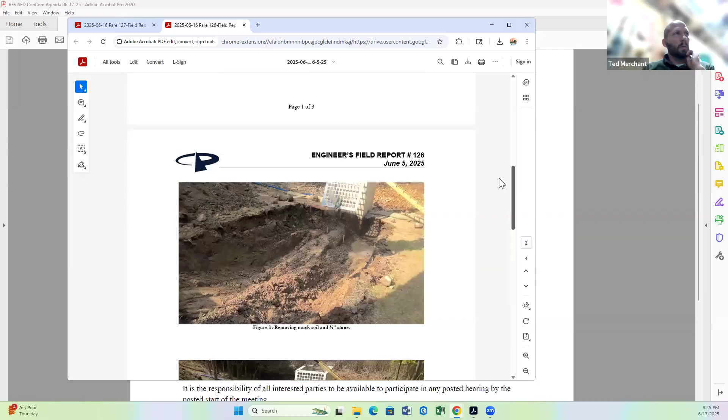And if I could, for a moment, we did supply a similar letter from Bohler that said that yes, it was installed as intended on the plan.

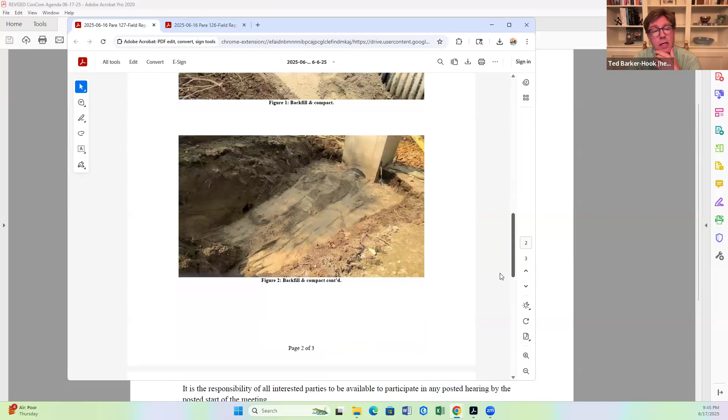Great, thank you. So again, Matt and or Melissa, I don't mean to put you on the spot too much, but I lean on you guys a lot when it comes to these kinds of issues, so I'm wondering if you have any questions or comments. You're always welcome to put me on the spot, Ted.

I can handle it. No, I think what I'm seeing here in these pictures and what Judy's describing and Rich is describing is exactly what we were pushing strongly for the last time we spoke. Source control was the big issue in my mind, and that's been addressed, and the pipe getting replaced and that berm being constructed the way it should have been many years ago are all steps in the right direction.

So I think we're at a point where they have satisfied our request. What I would be remiss not to mention is that this should be the expectation moving forward, that as work continues on the subdivision, source control continues to be top of mind, so that as other lots are being constructed, we don't run into the same issue down the road.

Yeah, amen to that. Melissa, do you have any thoughts you want to share? And if you don't, that's fine. No, I think I agree with Matt. When I look out my window the last couple rain events or weeks, the stream has been clear, so I'm happy.

So the request is that we free up the lots we put a hold on. Commission members, is anyone feeling not good about that proposal? Is there anyone who wants to suggest that we ought to wait a little longer? And if so, why? Nobody.

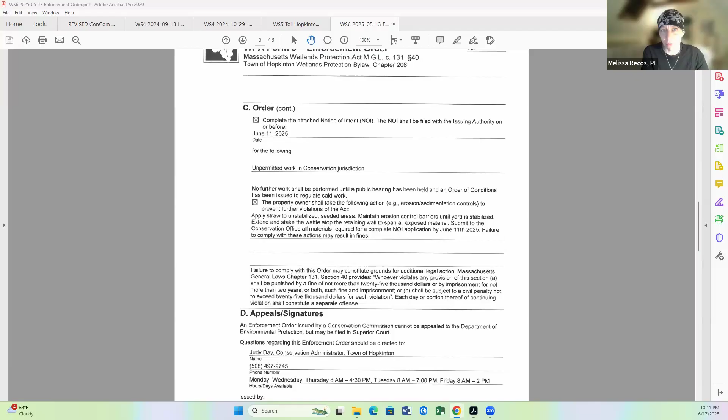So are you suggesting that we hold any fines? You said June 26th? I'm not asking for the NOI, I'm just asking for if you're going to get an engineer on board, if you're going to work with Mark Wadon, just get an email correspondence to Judy. Yes, I definitely will.

So now that I know it, a clear intent, and I do need to show that to you guys, I'm going to start it right away because I know this is going to take some time to get everything together. So I will definitely start it as soon as possible, and I'll let Judy know as well. I think what I'm hearing is if we can get some documentation that significant forward progress is being made on

an NOI by June 26th, which is also handily, nicely about a week before our next meeting, which will give us time to see what it is. Maybe some paperwork from, if it is Mark Wadon you're going to go to, maybe he can check in with Judy. So it's more than simply an email that says, hey, I called Mr. Mark Wadon. If we could hear something from him, that the wheels are in motion, I think that would make all of us feel a lot better.

Okay, and then we could pick up the discussion again on July 1st. And assuming things are going in the right direction, we can talk about holding fines in abeyance. If things are not going in the right direction, it gets to be a different conversation. I understand. Thank you very much for your time, guys.